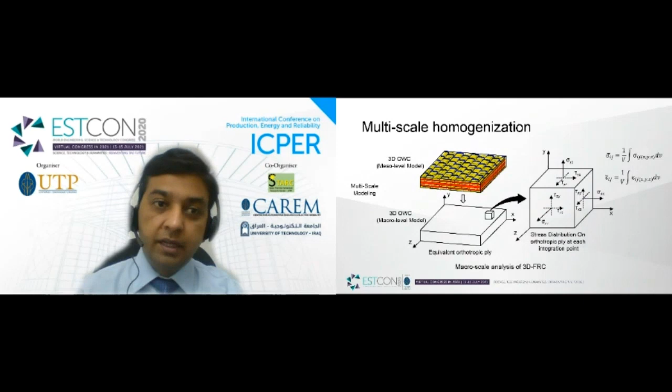So now the 3D fabric used in this study is 3D orthogonal e-glass woven fabric, which is obtained from Textile Industries, United States. The fabric consists of 3 layers of fibers along warp or X direction and 4 layers of fibers along fill or Y direction. The dry fiber volume fraction of this fabric is around 52% and it has 49% yarns along warp and fill direction.

So now in case of micro to meso homogenization, the analytical method used here is based on Chamis model, which requires elastic constants of fiber and matrix and their fiber volume fraction in impregnated yarns.

Whereas the numerical method for elastic constant prediction of 3D composite is based on periodic boundary conditions. The periodic boundary conditions are applied on the unit cell model of impregnated yarn. The unit cell model assumes that the fibers are arranged in hexagonal packing in impregnated yarn, whereas the dimension of unit cell is determined based on the radius of individual fiber and the relationship between the geometric dimensions.

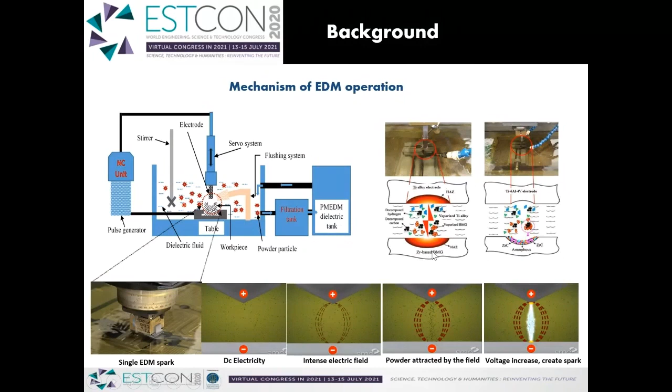So EDM initially has been used. EDM has been widely applied in the production of molds and dies, cutting tools, and is currently also used in aerospace and automobile industries, but the use of EDM in the biomedical field is still at the experimental stage.

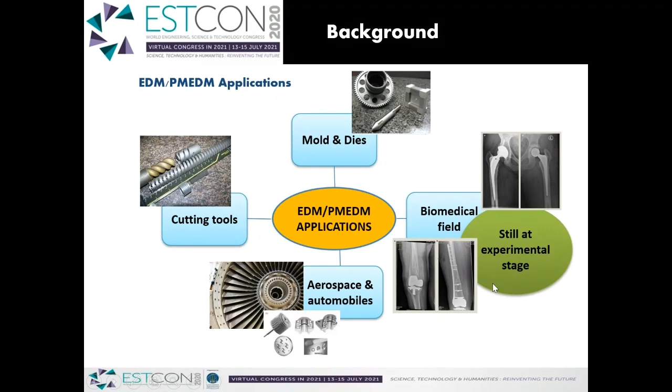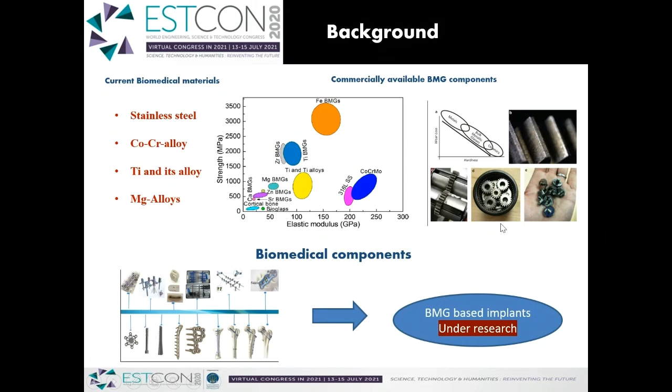BMG is also a newcomer in the biomedical field, although BMG has been utilized to produce numerous components for automobiles, aerospace, and others. So the material we used, as previously stated, is a zirconium-based BMG, and we adopted commercially pure titanium as the electrode, and we used hydrocarbon-based dielectric fluid as our fluid.

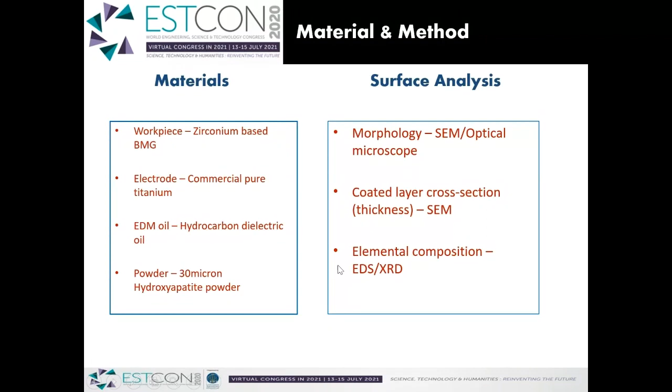And we use hydroxyapatite powder because of its biocompatible nature, the powder to be added into the dielectric fluid. And various characterization techniques will be employed to evaluate the experimental results.

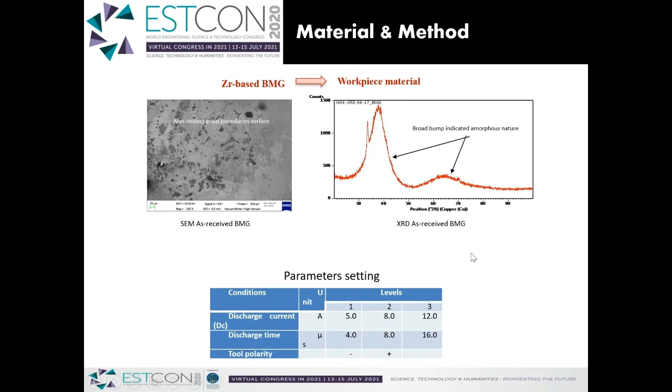The carbide might result from reaction between the zirconium and carbon in the workpiece and the hydrocarbon-based dielectric fluid, respectively. While the oxide might be due to reaction of zirconium in the workpiece material, and oxygen might be due to flame, which occurred due to heating and melting during the process.

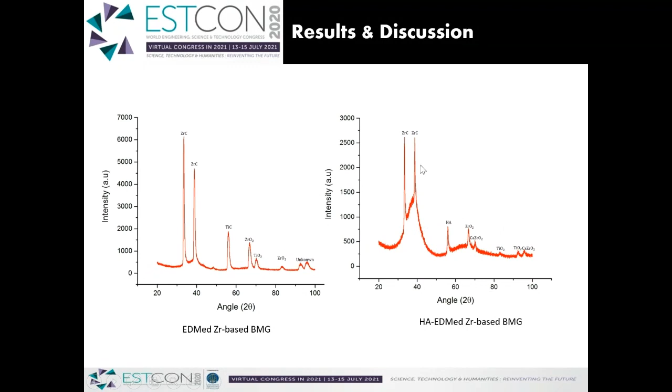While the HA-EDM XRD depicts the presence of some HA on the surface, and also some calcium-based and zirconium-based oxides. The calcium might be from the HA powder, which is added into the dielectric fluid. And although there are some sharp peaks, the amorphous nature is much higher than the crystalline peaks.

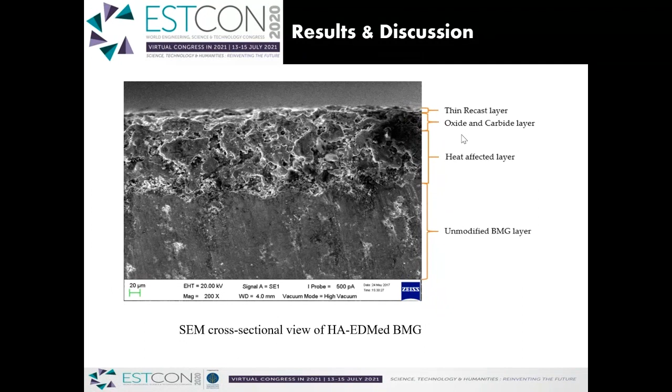This is the magnified image. It is done just to check the pore dimensions, especially the size and shape. This is another morphology just to check the layers developed on the HA-EDM surface. As you can see, a thin recast layer at the top, and also the oxide and carbide layer, followed by the heat affected zone, and then the unmodified BMG layer.

This is EDX just to confirm the elements and compounds present on the HA-EDM surface. As you can see, the EDX confirms the presence of high peaks of calcium. This confirms that EDM is a good process for depositing HA, or for coating the surface of bulk metallic glasses.

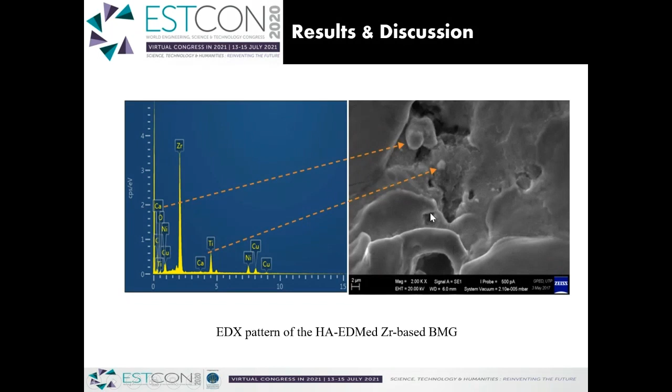In conclusion, we can say that HA-EDM can suitably be used to shape BMG without much influence on its crystal structure when proper parameter settings are utilized. And also, when 4 microseconds discharge time and 5 ampere discharge current are utilized, the amorphous nature is much more maintained.

The XRD characterization confirms the formation of zirconium carbide, titanium carbide, zirconium oxide, and other calcium-based oxides. And numerous interconnected nanoporosities with diameter around 502 to 781 were also observed. The EDX pattern shows the deposition of some calcium-based oxide and some calcium elements on the machined surface. This further clarifies the suitability of the EDM process as a coating technique of BMG material.

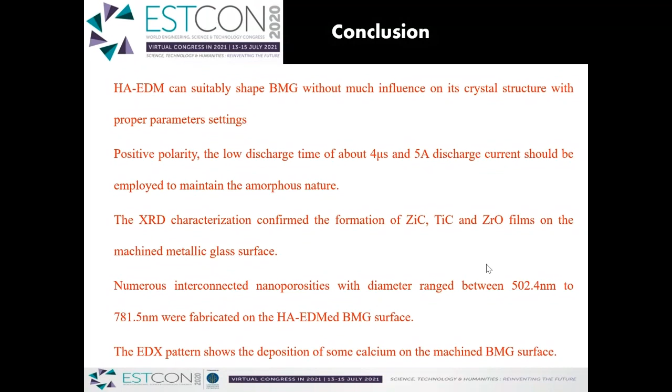Okay, thank you for the nice work. It's really very good work, and the achieved results are industrial-based results. Very good presentation. Thank you.

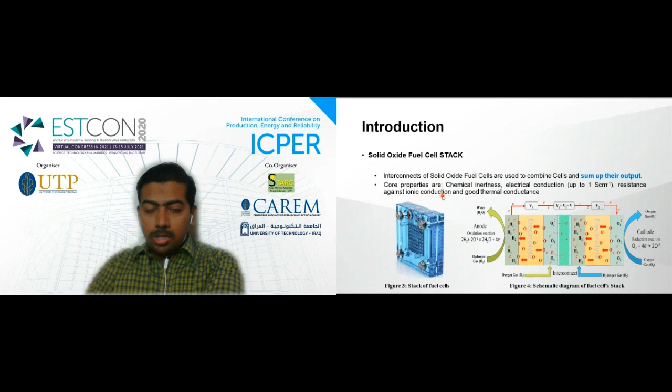place this interconnect material. It should have chemical inertness, electrical conduction, ionic resistance, and good thermal conductance. Initially, ceramic materials were used for interconnects, but modern low temperature SOFCs use metallic interconnect materials because of better electrical conduction, low cost and easy fabrication. But these materials have some issues. The main problem is corrosion and chromium migration.

Almost every steel has a chromium layer at the top surface. When it is heated in the SOFC environment, the chromium layer reacts with oxygen and water molecules to form chromium hydroxide, which is volatile in nature. It penetrates into the respective electrode and decreases output voltage. As chromium oxidation increases, electrical resistance also increases, which decreases fuel cell efficiency. So we need to control it.

From previous research works, different types of alloying elements have been added; they increase electrical conduction and decrease oxidation, but not significantly, so we cannot use them widely. Another method of controlling chromium migration is coating, used by different researchers with different spinel layers, but none of them worked significantly. I used dip coating because it is an easier method to coat a layer over this surface. I will discuss this later.